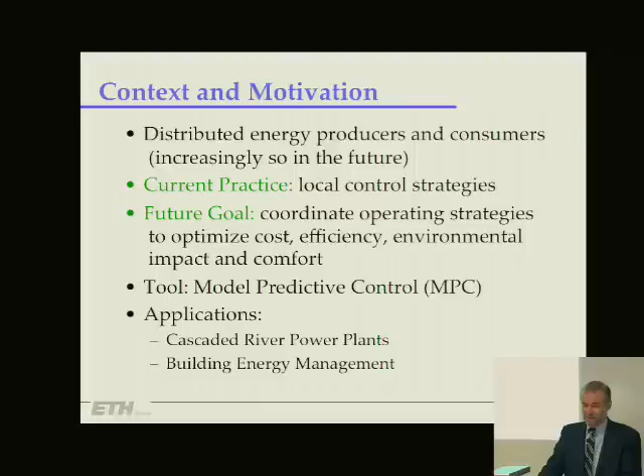The talk today will be very much application focused. Let me first give you some context and motivation for what's going to follow. Energy producers and energy consumers are distributed - consumers we know, producers increasingly so with the increase in alternative energy sources. The current practice, at least referring to the examples in the seminar, is to have largely local control strategies. The future goal would be to coordinate those strategies in order to optimize cost, efficiency, environmental impact, and comfort.

The tool that you will see being used is this technique, model predictive control, that I talked about when I gave this series of seminars here last year. I will briefly summarize that and then talk about two applications that we are involved in. Both are projects in progress, not completed. One has to do with hydroelectric power, and the other with building energy management. In both cases, we'll see how we can apply model predictive control.

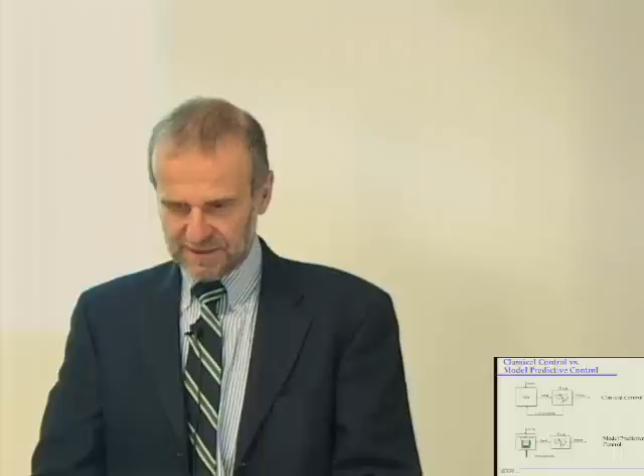So first, let me give you a short outline of model predictive control. You have on top this slide showing, I think it's an automatic transmission. Classical control would be what you learn typically in your undergraduate control course, some transfer function or something like this, K of S, that represents the controller. But what you would do now, and what I will talk about, is replacing this controller K of S with something much more elaborate, complicated, and sophisticated - I just call it optimizer here.

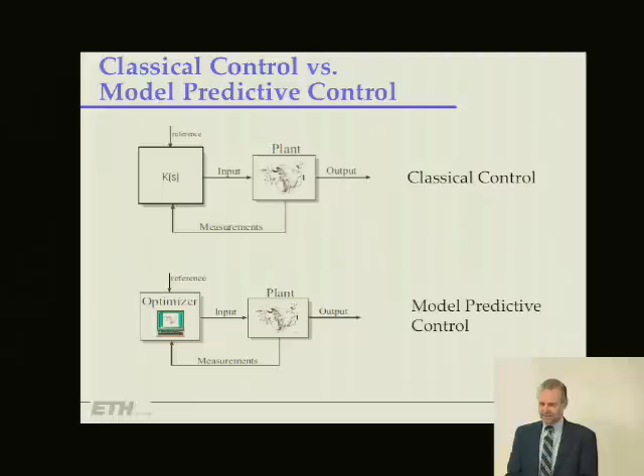The idea behind this optimizer is that you will solve a so-called receding horizon control problem. For example, you would like your system to follow some trajectory indicated by that line. Then you formulate a problem in order to calculate the manipulated variables over some future horizon such that your predicted system trajectory follows as closely as possible, defined by some metric, the required set point.

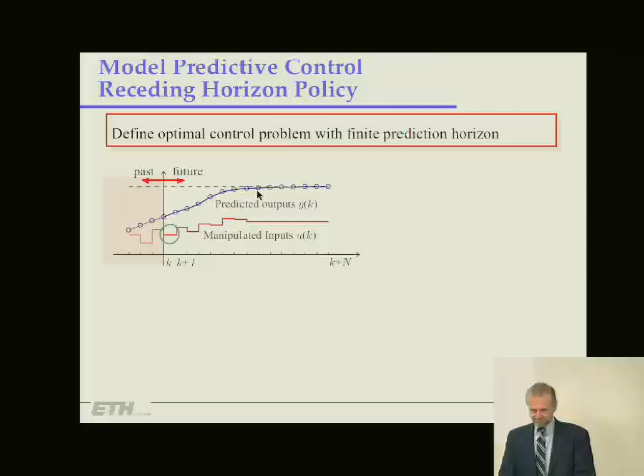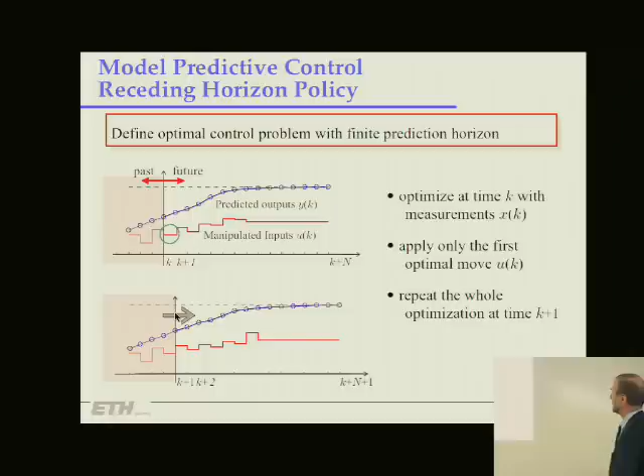And obviously, disturbances may happen, model predictions may be inaccurate, and so the idea is that you apply only the first one of those pre-calculated moves and then take another measurement of the situation of the system at the next time step.

Formulating it somewhat more rigorously, we can formulate a performance index, some P norm of a weighted state and weighted input over some horizon n. The objective that we minimize online is that we find the sequence of control actions U over this horizon, as indicated previously, such that we minimize this objective subject to model information, subject to constraints.

Looking at the block diagram again, similar to what I presented before, we have this optimization problem. We figure out the sequence of future control moves, we implement only the first one on the plant, retake information from the plant as a new measurement, and then redo the optimization problem.

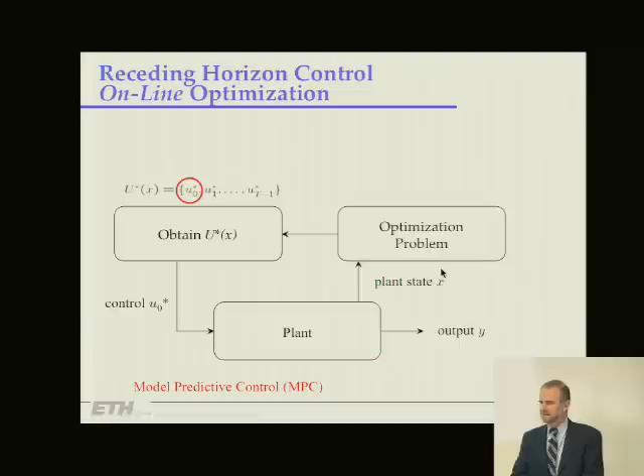Now, almost 10 years ago, it was realized that you actually can pre-compute rather efficiently, at least for a small system, the solution of this optimization problem. So instead of solving the optimization problem online for each measured plant state, you just pre-compute the solution for a set of plant states that you are likely going to visit. This is then called a parametric optimization problem.

Instead of solving it online, you're computing a lookup table effectively that has the solution of this optimization problem: you have the state, and the control action explicitly given. So online, all you need to do is use this lookup table. That was around 2000, discovered more or less simultaneously by different groups in Norway, Australia, and Switzerland. That you can do it in principle is clear, but that you can do it numerically for a reasonably sized practical system was not obvious at that time.

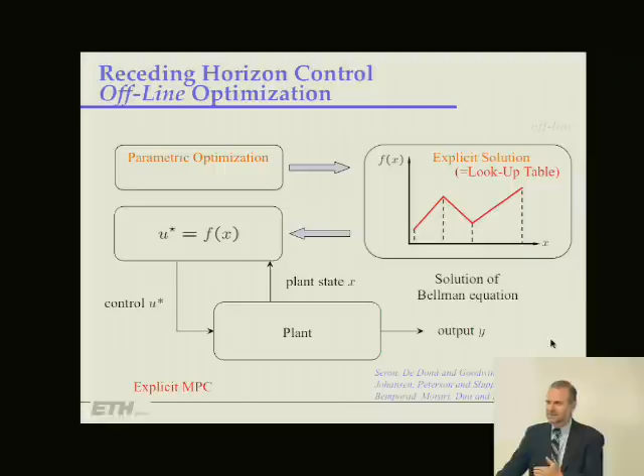What's interesting, looking back, I just came from a workshop in Pavia on nonlinear model predictive control last weekend, and 10 years ago there was the first such workshop. Then, the whole workshop was focused on process control and chemical engineering problems. Now, 10 years later, process control had essentially disappeared, and the workshop was focusing almost exclusively on a wide range of other areas.

And why? One reason is undoubtedly this explicit computation, and improved computational resources in general, that now allow this somewhat more complicated approach to control computation to be taken to a whole new group of applications.

In terms of properties, clearly, if I calculate this control law explicitly as indicated, or implicitly by doing this online optimization, I get the same control action, so the properties carry over from the online optimization to the explicit control law. These have been studied extensively in the literature over the last two decades, and very strong results are available on how to choose the controller parameters, how to formulate the optimal control problem such that this receding horizon property guarantees stability, guarantees satisfaction of the constraints, etc.

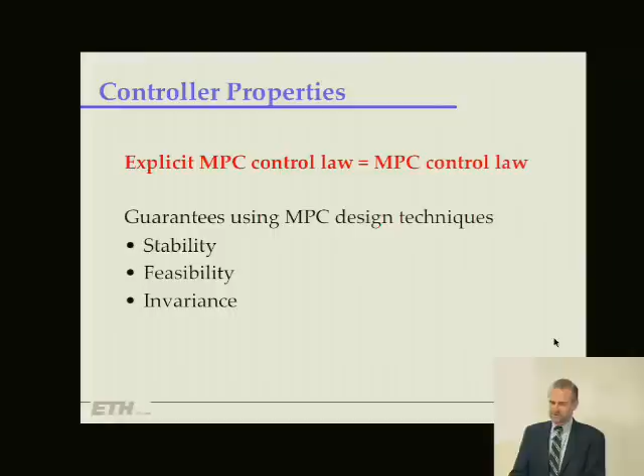And I would claim it's actually the only tool that is applicable that broadly that gives you those types of guarantees.

Depending on the model that you use and depending on the objective function, you get different types of optimization problems. Most commonly, and what was the original formulation, is that you just have a linear system plus constraints, and then this optimization problem, which you would have to solve online to obtain your control action, will be either a linear program or a quadratic program, depending on the objective function.

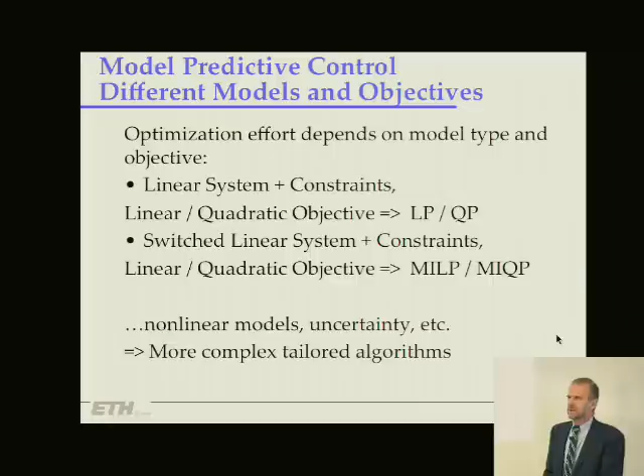In the next step of complexity, if that linear system is not constant but a switched linear system, then the resulting optimization problem would be a mixed integer linear program or a mixed integer quadratic program, again depending on the objective function. A lot of other extensions were studied with nonlinear models and how to account for uncertainty, and depending on that formulation, you get more complex optimization problems that generally need to be tailored to that particular structure of the problem, in order to allow an online solution, or even an offline solution, within the sampling time that is available.

So that's the background. What I want to do now is go into the first of those two application areas and show you how those problems are handled traditionally, and how they are now handled, or intended to be handled, within this new framework of model predictive control.

So this first project is a collaboration that's going on, financed by E.ON, the big energy company. There are also two smaller companies: Wittmeyer, that makes control systems, and Cytec, which is a consulting company, especially for the hydroelectric power sector.

So how important is hydro? If you look at global electricity generation, about two-thirds of electricity globally comes from fossil sources, and the rest, half of it comes from hydro and half from nuclear. Then there's a little bit of new renewables, meaning not water, but solar and wind, etc.

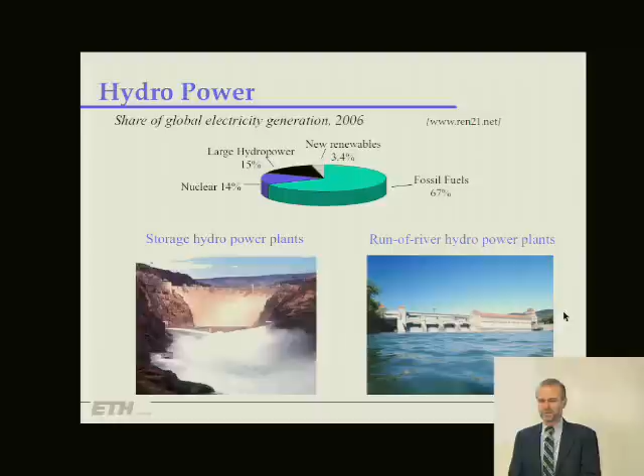In hydro, you distinguish two types. You have some storage hydro plants, like indicated here, or you have river hydro plants, and that will be the type of hydro plant we are focusing on in our work.

Now, looking at Switzerland, obviously a small country with small consumption, but Switzerland is very green in the sense that roughly half the electricity comes from hydro and half from nuclear. There's no fossil power. I say roughly because there's a rumor that some odd accounting is going on, in the sense that one buys electricity from nuclear plants and stores it in hydro, pumps water up and stores it there, then sells it as green power the next day. But roughly it's 50-50.

In terms of the distribution between power plants, you have about half run-of-river and half storage power plants, and then a small percentage of hydro power plants used for energy storage.

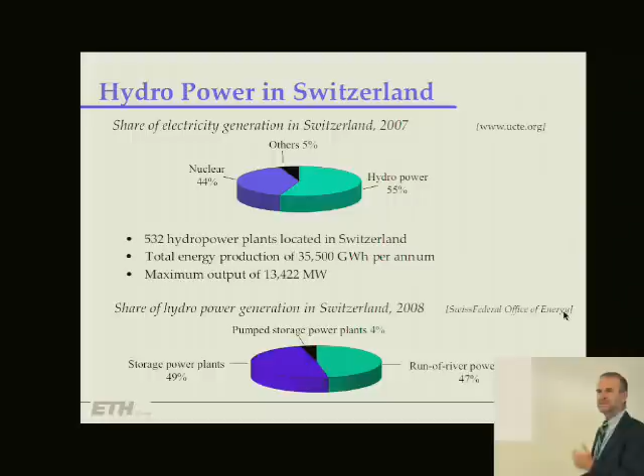We had a big discussion just two days ago in terms of energy storage, and it turns out that, assuming you have the space and water available, that is one of the most effective ways of electricity storage. It's about 75% effective, meaning you get the electricity, run the pump, pump it up, let it down, regenerate the electricity, and you have about 25% loss. That's hard to beat with other technologies, at least at present.

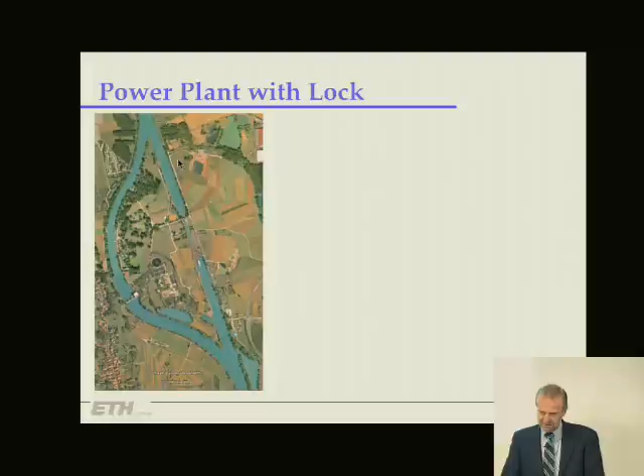So let me give you the problem definition. Here's a power plant aerial view -- sorry, river aerial view. The power plant is actually this little thing here. This is the route of the river used for shipping, and you have some locks at this location.

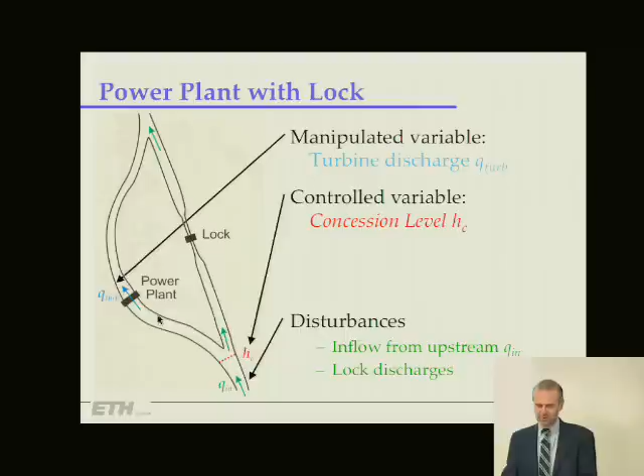As disturbances, you have inflow from upstream on one hand, and second, operation of the lock, which disturbs the flow of the river. You have to account for this when you operate those turbines to keep the level at the required point.

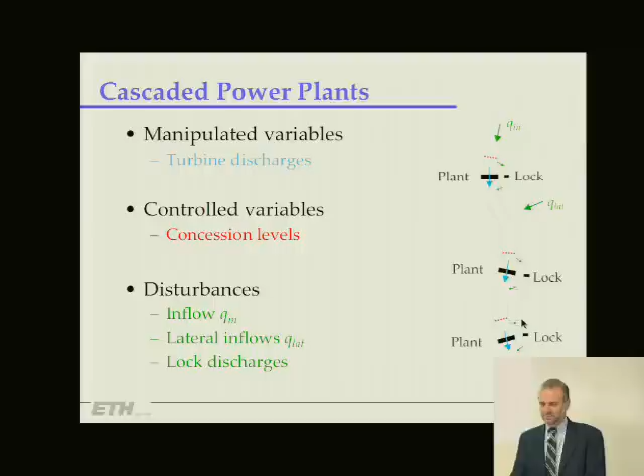Now the challenge comes when you have a cascade, another single power plant, indicated here. The variables stay the same. The cascade also offers the challenge of having inflows from the side and disturbances from the locks, and you have to, in principle, coordinate those tasks between the different power plants.

Now what's the objective, at the minimum? It is that you want to keep those concession levels within a certain range, that you don't want to change the turbine flow very frequently, and you want to respect the concession level, and you also have some absolute constraints on the turbine discharges.

Now there are other objectives we have not considered at this point, but which can be important in certain situations, and that would be maximizing or optimizing the economics as the driving objective when operating those power plants. The idea is that you generally charge more for electricity at peak periods than, for example, at night. So you could think about storing the river flow in those pools at night and then generating electricity during the peak price period during the day, while obeying the limits you're allowed in your operation.

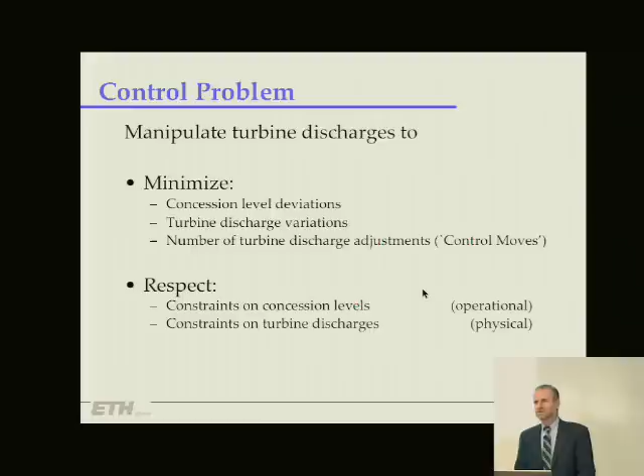So there's this link to economics, which in this particular site we are studying is not possible or not relevant, because you don't have enough capacity to do that storage. But I heard there are facilities in France where that would be attractive.

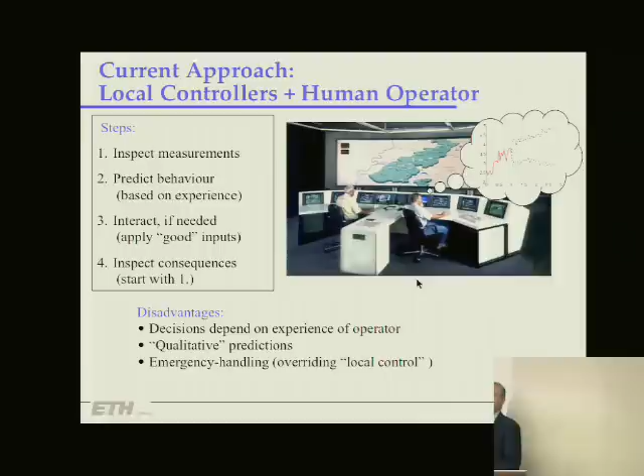So, control strategy: what's done traditionally is they have some simple local control strategies, and a big operator console that looks over the whole river, where operators inspect the behavior of those local control strategies. They check if everything is okay, and if they see likely wrong behavior, they step in and do some overriding actions that correct the local control action. So it's rather primitive, what is done at present.

And clearly what we would like to do is replace, or at least substitute or assist, the operators with a more advanced strategy, where we use a model to predict the behavior of the river and then apply optimal inputs, in the sense I discussed, in order to meet those concession levels, optimize economics, etc.

So let's talk a little bit about the modeling and the control. For the model, we use the classic partial differential equation from Saint-Venant, dating back to the 1870s.

That is the typical hydrology equation that is used. We have conservation of mass on one hand, conservation of momentum, so we get a first order partial differential equation, which gives us the flow as an input parameter, and which gives us the height of the river as a function of the location and the time.

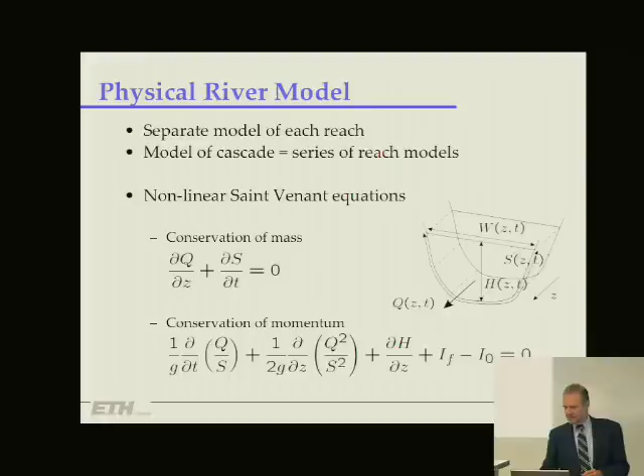And that model is discretized in time and space in a standard manner, and gives us then in this form actually quite a high accuracy description of the behavior of the river, relatively high order.

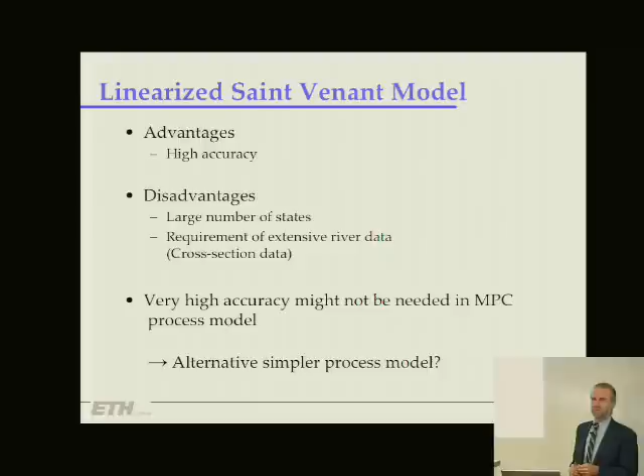And the question that we will have to tackle, as I will mention later on, is that to look at somewhat simplified models, because we will get, as you will understand in a moment, very large optimization problems that can at present not be solved in the sampling time that is available.

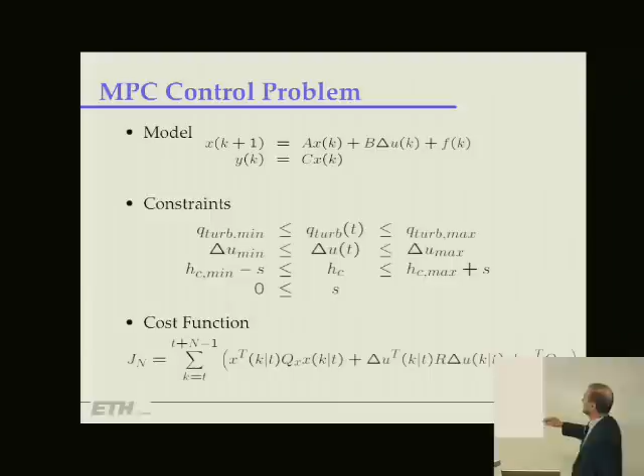Here an indication of the model predictive control problem formulation. So it's rather standard. You have your constraints on the turbine action, on the change in the turbine, and you have constraints on the levels, and you can handle those with slack variables, where you put different weights on the slack variables depending on the range in which you allow this level to vary.

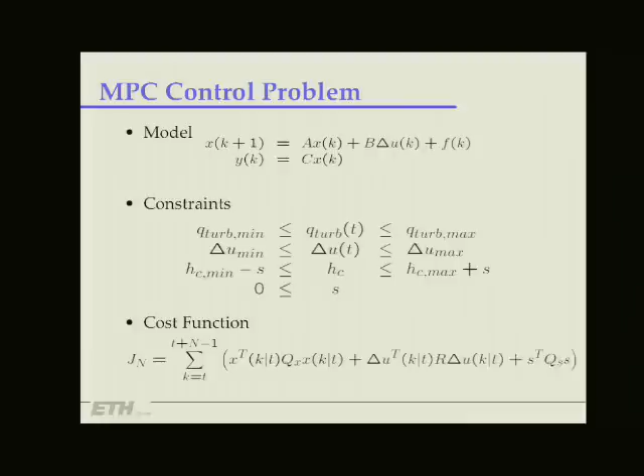So up to now, with a linear model, linear constraints, quadratic objective function, you would have a QP, which would be very easy to handle.

Unfortunately, there's some other constraints that the operating people rather insist on, and that is they want to enforce a dead band on the turbine discharge variations.

That means they don't want to vary the turbine every 5 minutes by a tiny little increment, but they say we vary the turbine only once it prescribes a variation that is above, outside, or bigger than a certain deadband range. And so in order to model this type of deadband, you need some integer variables that model this switch that you want to enforce.

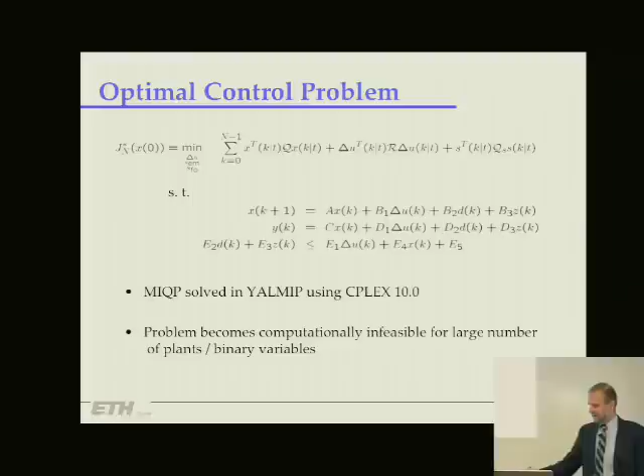And the problem here is, especially, or only, because of this integer variable, that the problem becomes computationally infeasible within the time period of the sampling time, which is 6 minutes, for a larger number of plants, and that will indicate what larger is in our context.

So in terms of case studies, at this point, simulation case studies, but the intent is that it will be implemented on the whole river. We have a very detailed model of the river with a simulator from the company SCIETEC that I mentioned.

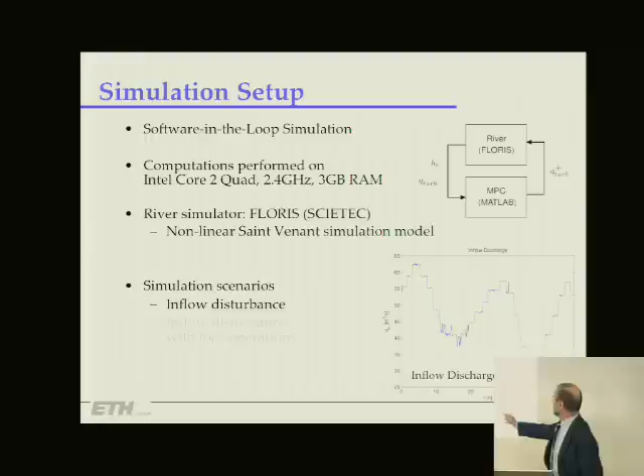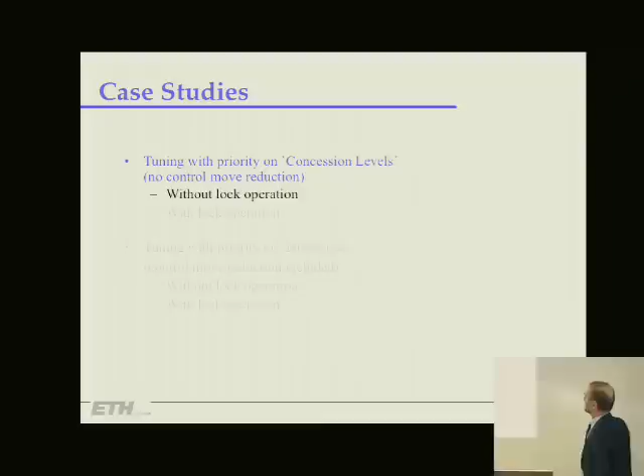And we are studying the behavior for a range of inflow variations of the type indicated here. I will not show you the many case studies that we have done, but just one or two that will indicate the behavior that can be achieved relative to the current strategies.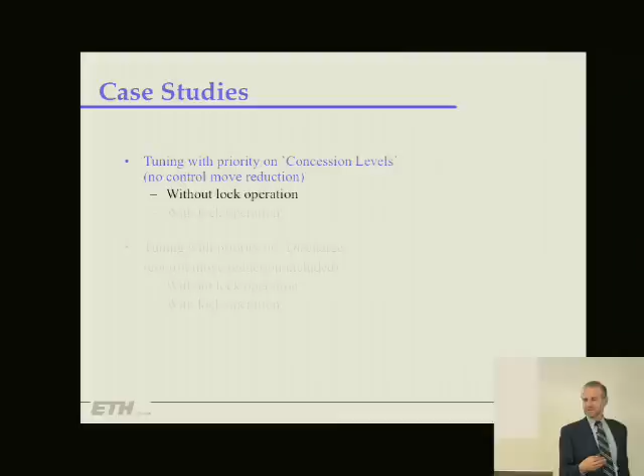So here's a behavior that emphasizes in particular holding the concession levels constant. You can obviously go the other extreme, wanting to vary your turbine as little as possible. So you can go through the whole continuum of strategies between those two extremes.

So here are the details. This is the inflow scenario, and in this particular simulation, 4 power plants are considered, with a 6-minute sampling time. You look into the future, 25 steps, so about 2.5 hours. You have various ranges in which you want to keep that concession level.

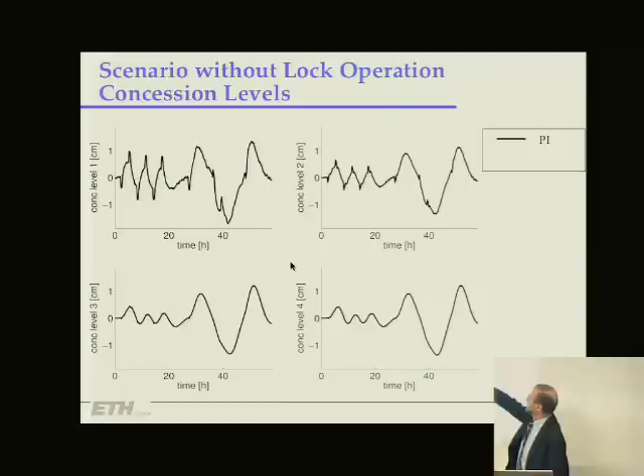So this would be a traditional strategy. What's given here is the concession level as a function of time in response to the disturbance input with a traditional PI controller, and then the improvement that you get with this model predictive controller indicated here.

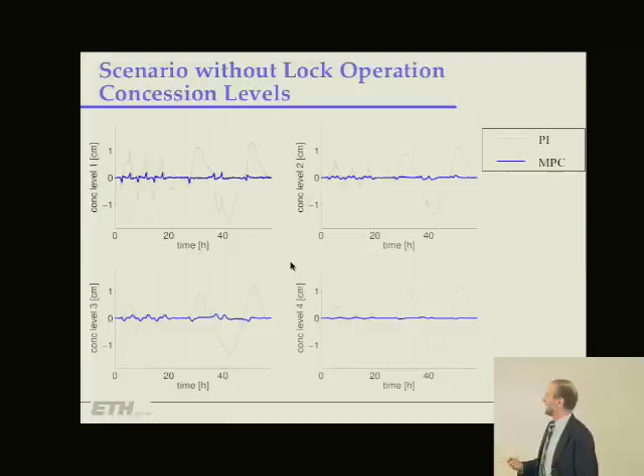Now, when one sees something like that, the first response is, okay, that would probably need very aggressive action of the manipulated variable in order to achieve that behavior relative to the PI behavior.

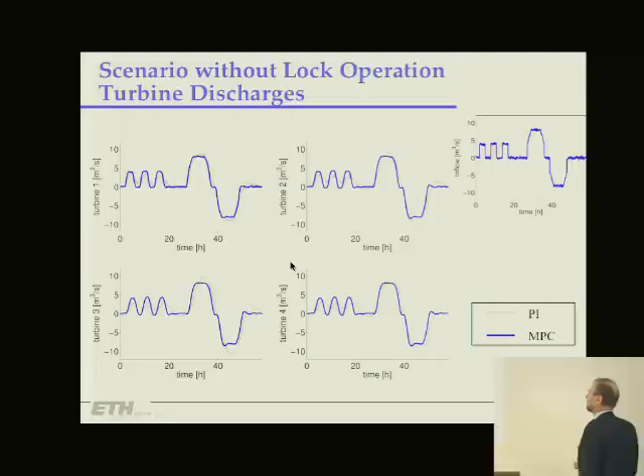But it turns out here the manipulated variable action, meaning the turbine discharges, again for the 4-power plant, with the traditional PI controller compared to the model predictive controller, the differences between the two control actions are very little. So it means with a better and more intelligent control action, you get vastly improved control without more aggressive control action as you would usually expect.

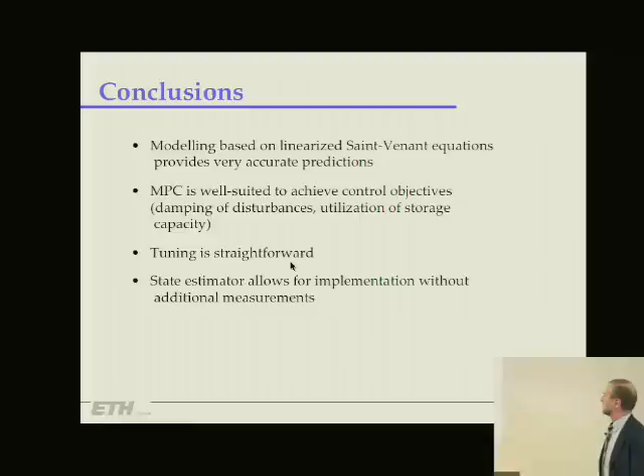So in terms of conclusions and outlook, models, as we said, are standard based on those linearized Saint-Venant equations. MPC is well suited for that example. Tuning is straightforward. State estimation is required, but also rather straightforward.

Now, what's the outlook? The outlook is to go from the currently 4 to 35 power plants. That is a river in Germany. Actually, there's no river in Switzerland where we have 35 power plants.

And not only that, Switzerland is so fragmented in terms of the power industry that you don't even have a situation where there are more than 4 power plants in a row owned by the same company. And if it's owned by different companies, then they don't talk to each other, so again, the strategy that requires coordination is not feasible.

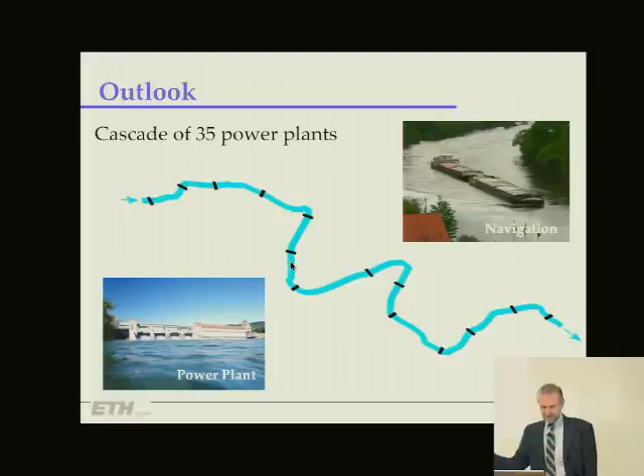But then in Germany, they have very big setups, going over a length of about 350 kilometers. And there, the strategy that we are investigating now is some type of decentralized MPC strategy, where we would have some local controllers with some coordination between the subsystems.

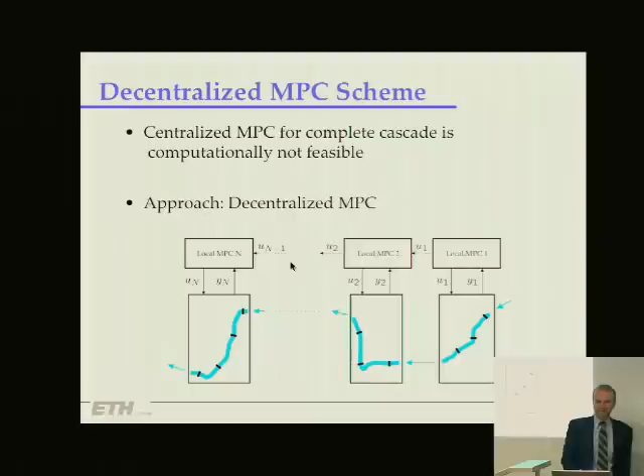The coordination, depending on the need, could be, for example in this case, probably only downstream, where you would forward the predicted turbine discharges from one power plant to the other to achieve that type of coordination. So this is the outlook.

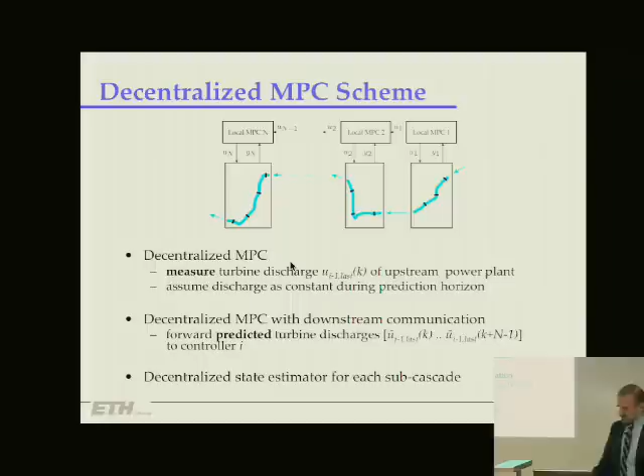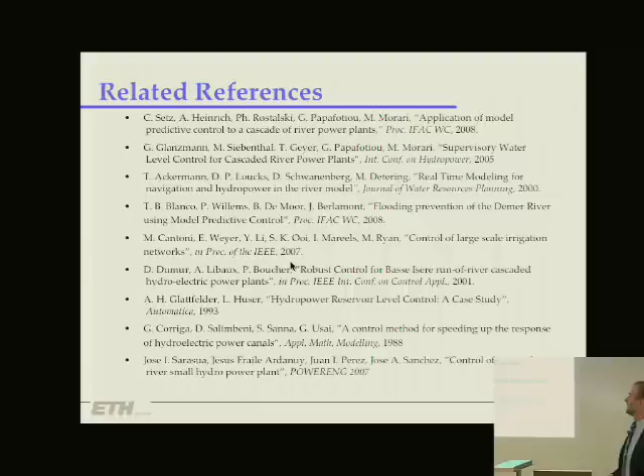I should mention, and I will not dwell on this, there are a number of references to what other people have done. The problem has been studied, for example, also in the context of irrigation channels, where the objectives are somewhat different, but the problem is similar. So that, as I said, is ongoing, and the objective is that next year this should be implemented by E.ON in Germany on the 35 power plant system.

So the second example that I want to look at is energy management systems, and in particular using weather forecasts in order to enhance comfort and to save energy. This is a large collaborative project, and I will describe the partners in a moment. We'll start with some data for motivation that I actually took out of a proposal that Berkeley was part of. So those are data for the US.

Why are buildings important? Buildings are a major consumer of energy. If you divide the consumers into industry, buildings, and transportation, each one of those sectors takes about 1/3 of the total energy consumed in the US. Specifically, buildings take about 39% of the energy, 71% of the electricity consumed in the US, and 54% of the natural gas.

Buildings are a major producer of carbon emissions. That means buildings are an extremely important consumer of energy and producer of carbon dioxide, and therefore should probably receive the primary attention in terms of improving energy efficiency and carbon emissions, rather than cars, for example.

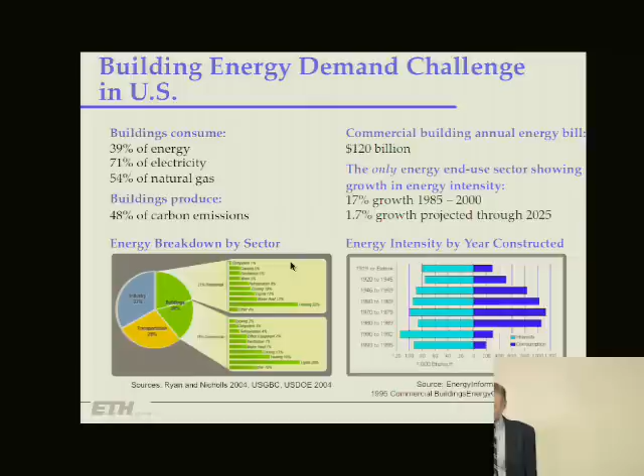Now, in this proposal that was recently funded, HiPerBRIC, where Berkeley, Lawrence Berkeley Lab, as well as UCSB and United Technologies are involved—the vision here is to come up with new strategies to enable a total transformation of the US commercial building sector over the next two decades.

And the goals are very ambitious, as you can see here: 400 million tons of CO2 reduction annually, reduction in energy consumption of 90% in new buildings, etc.

And obviously, if you see that, then you ask yourself, is this something you write for a proposal, or is this something you believe in? Is it something likely going to happen? Is it like weaning the US from fossil energy within 10 years? Is that equal to that? And actually, this is not unreasonable.

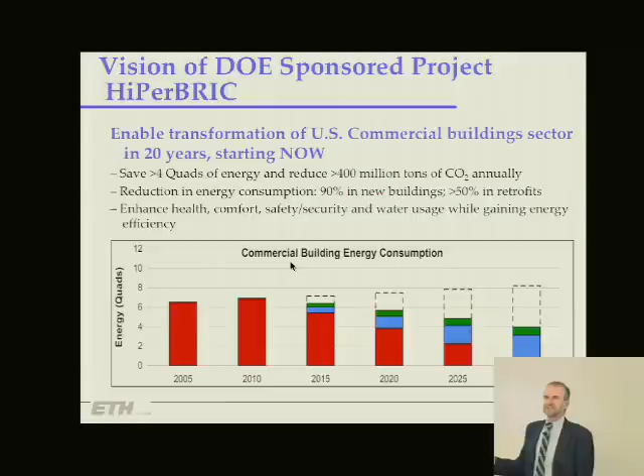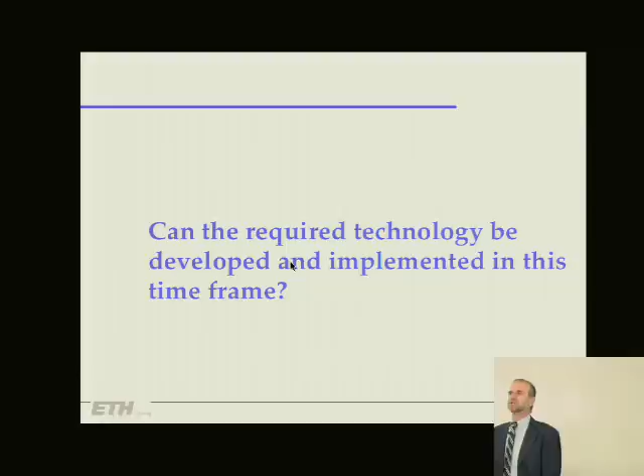I will now give you an example from Switzerland that shows there is a technology available that can be implemented in this time frame if one puts the mind to it. Now, this example is not easily duplicated, but it shows the technology is there to do that.

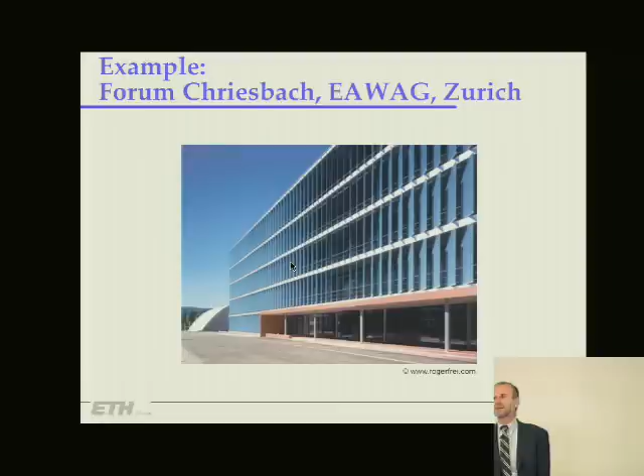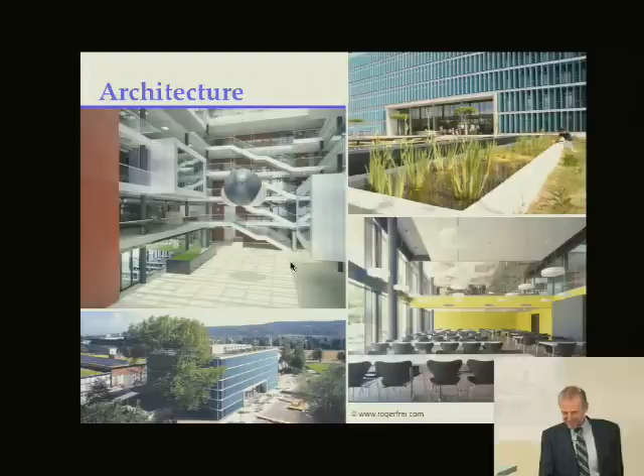It's a building that is actually part of the ETH buildings, close to the ETH campus, for aquatic research. Just to give you a sense of the building, it's 10,000 square meters, roughly 100,000 square feet. Cost 33 million Swiss francs, unfortunately equal to dollars now essentially. Area for 150 people: offices, lecture halls, seminar rooms, book communication zones, and so on. Architecture, I think, is beautiful. Here you have the water molecule as a main decoration in the building.

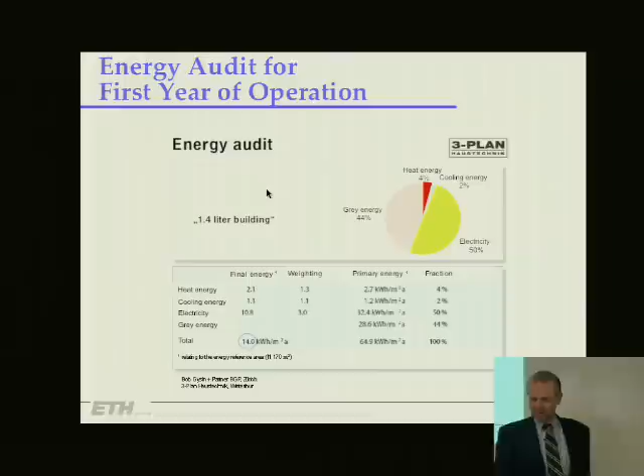Now the data from the first energy audit. So those are not design numbers, those are actually measured numbers of how much energy was consumed in that building. Focusing on this, this is a number of kilowatt hours per square meter annually. 14 - if you're not in this area that won't mean much, so I'll put that on a relative basis. This would be primary energy demand, kilowatt hours per square meter annually, for a usual new building in Switzerland, for a so-called minergie building, that's a new standard, minergie plus, and then this new building here that I was just describing.

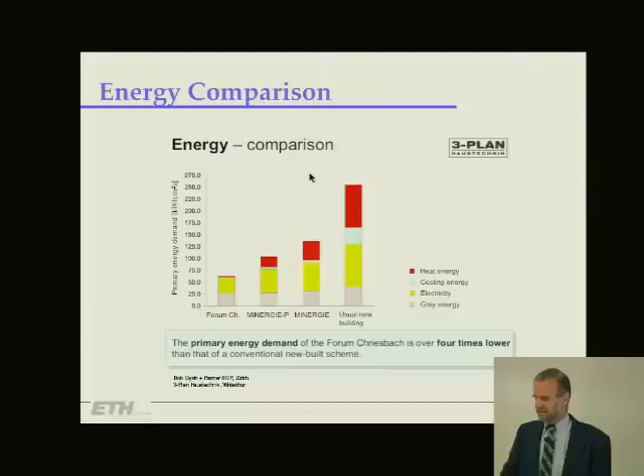This is actually the energy amortized over the life of the building, that's for the construction of the building. Yellow is electricity, and the heating and cooling is just this part here. And if you compare it with standard, that's a reduction of more than a factor of 4 compared to standard building technology in Switzerland.

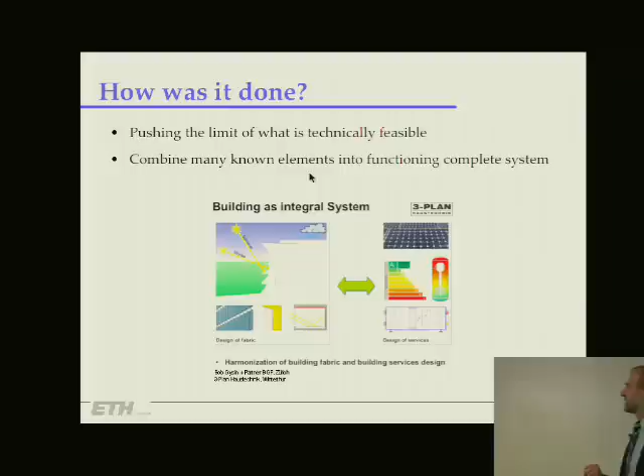So how was it done? What did they do to achieve that? Actually, no new technology was required. They just pushed the limit of what is technologically feasible at that time, and in particular combined the different elements in a systems approach in order to achieve that overall result, in particular coordinating the building structure and the building services design.

And this is just as background for what we want to do, utilizing those weather forecasts. First, the project partners that are involved with us: it's led by an institute called Terrestrial Systems Ecology, our lab, the material testing lab of the ETH, then the Federal Office of Meteorology and Climatology, and Siemens Building Technology. Siemens, you probably know, is mostly headquartered in Germany, but actually Siemens Building Technology is headquartered in Switzerland because of some acquisition that went on. It's a 4-year project funded by various agencies, and we are here at the beginning.

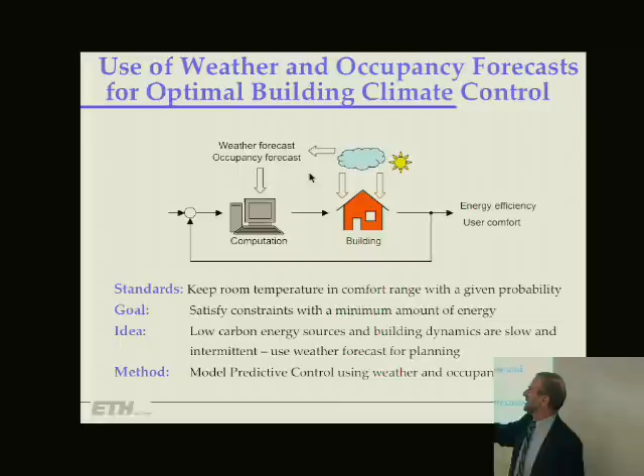So the idea is obvious in the sense that building dynamics tend to be slow - this is an old building, a lot of thermal mass. You have new energy sources that tend to be intermittent, let's say solar or wind or something like that. And so clearly it would most likely help to know what's going to happen with those sources when you control the climate in that building. So the idea is you include those weather forecasts in the control strategy that you are proposing for the building. And I will show you some preliminary first results on what you could possibly gain from doing so in a particular situation.

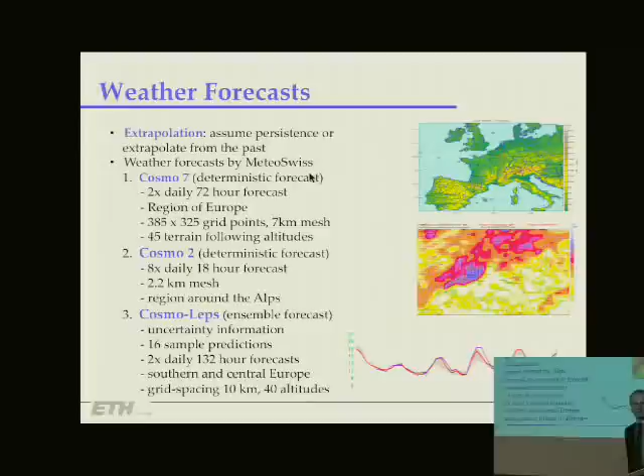So weather forecasts - this is a shopping list of what we have available in Switzerland at least, from the simple, meaning simple extrapolation that tomorrow will be like today, to 3 different elaborate models that can give you deterministic or even ensemble forecasts with some uncertainty information. And the models differ in how often per day they provide those data, over what time horizon, over what area, the grid point or mesh size that's available, etc. Now, obviously, at the end, we want to use the simplest that gets us the furthest, and we will see what that is.

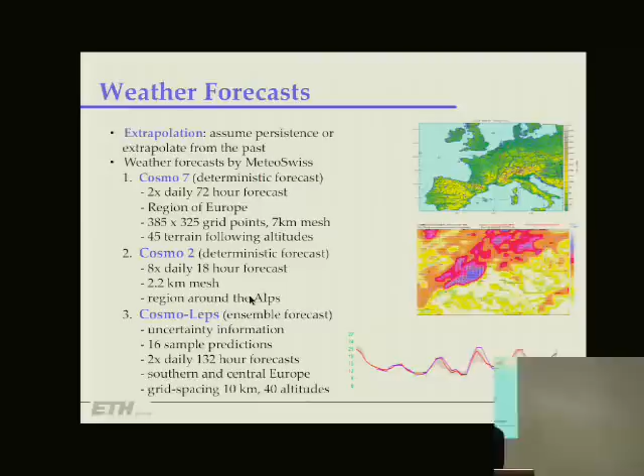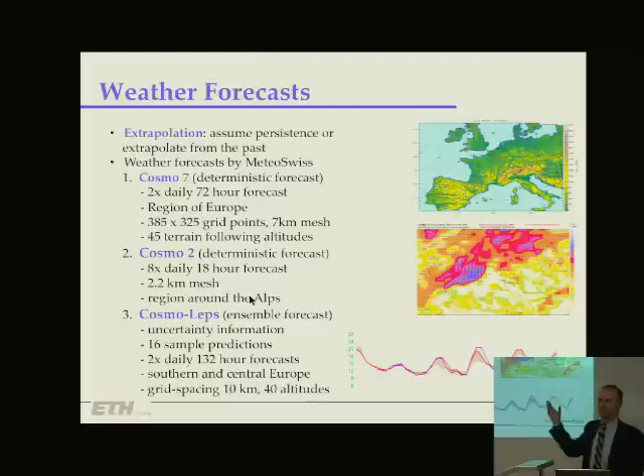I was actually also very surprised - I don't know if anybody's here from this area, but I expected that all those weather forecasts you see on television are basically automatic, that you generate this and give it to the people, but it's not the case. There are people interpreting, personal interpretation, and this is what you see. Actually, there's almost nothing that is immediately automatic, so there are some people filtering in between.

So at this point, we're looking at a small part of this whole building automation. We're looking at integrated room automation, and that means integrated control of the heating and cooling system, blinds, and lighting.

Clearly, as I said, the idea is obvious. Question is, does it gain you anything?

Before we get involved in developing elaborate control strategies, you want to find out what I call here the size of the prize. How much is potentially in it in such a control system? How much can you gain using weather forecasts?

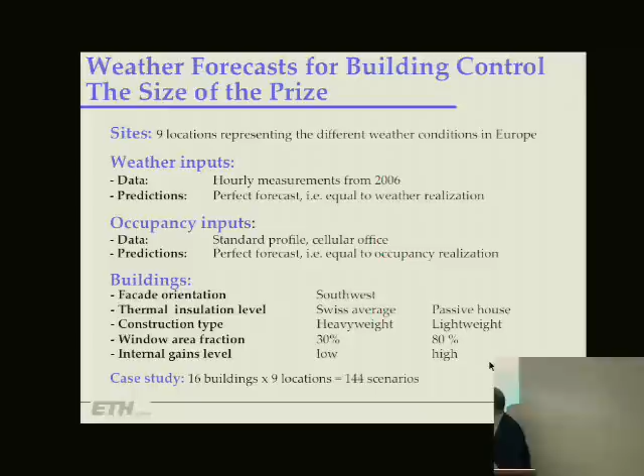So we did a massive set of case studies across different locations in Europe, weather input, occupancy input, building orientation, different thermal insulation, construction type, window areas, etc. This is a sample from about 150 case studies, and I'll show you some numbers from those.

This should not be mistaken as what you can actually achieve. This is the maximum you can achieve—the ideal situation where you assume the weather forecasts are perfect, you know exactly what's going to happen, and you have a model of the building, etc.

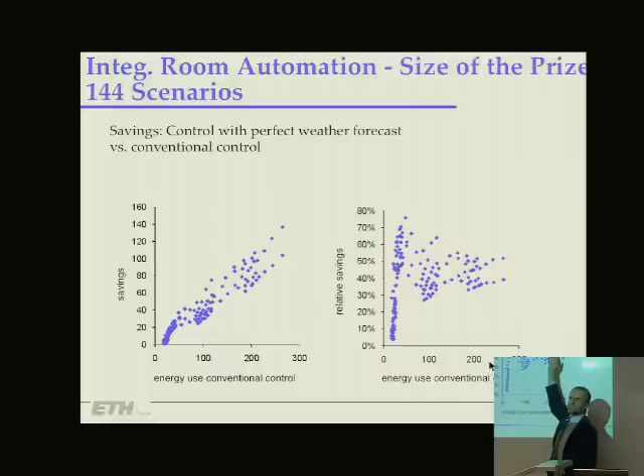You see that for some scenarios you can achieve quite significant savings, but there's also a significant spread—in some cases you can save almost nothing, in others a lot. So it's very situation dependent.

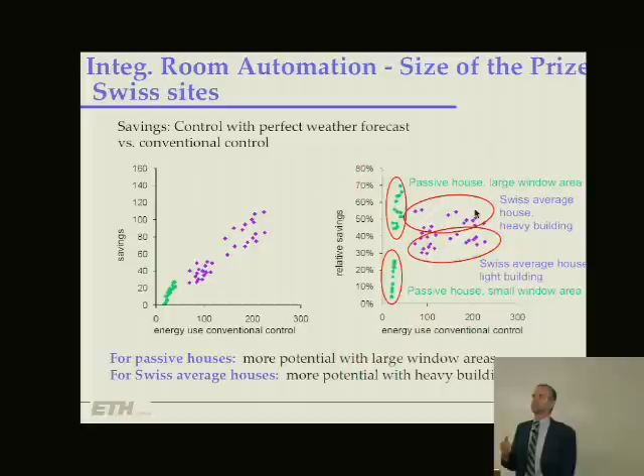If you analyze further—and this is again a glimpse at a large amount of data—for example distinguishing passive housing from the Swiss average house: large window area is good for passive houses, while heavy buildings with large thermal mass are good in terms of having a lot of potential for improving energy efficiency by utilizing weather forecasts.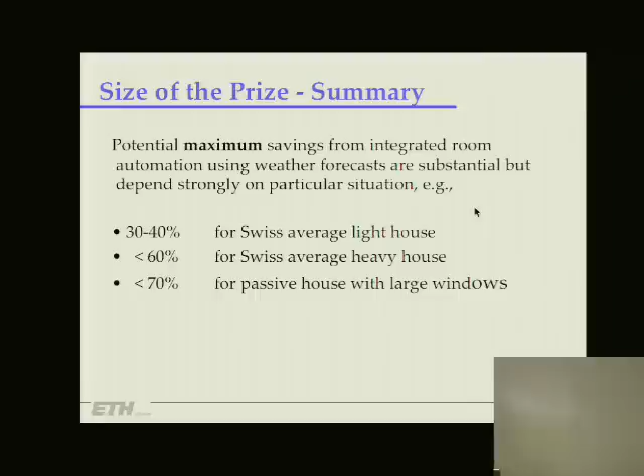So this is summarized here. I emphasize the potential maximum savings from such an integrated room automation system, but it depends strongly on the particular situation—it can be 30 to 40%, 60, even 70% in some cases.

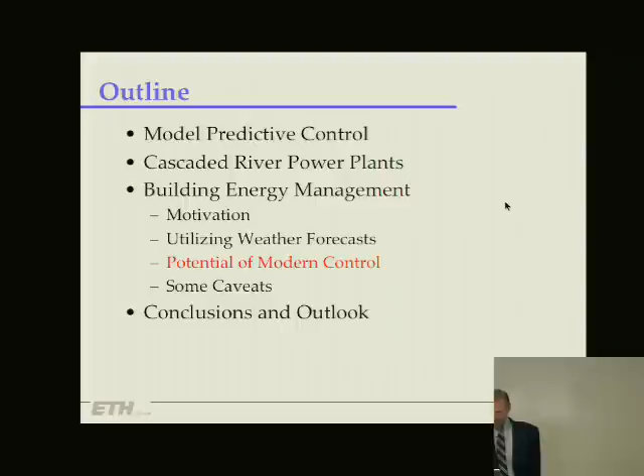How can we get there? I gave you a maximum achievable energy efficiency target, but what do we have to do to get to that target? That's about looking at different control strategies.

I want to give you a sense of what these control strategies do in the context of building control using weather forecasts, using diagrams which are largely cartoons. The idea is you don't need a perfect temperature in this room—say 68 or 70 degrees—you need a temperature range, and you want to obey that range most of the time, 90% of the time, etc.

So we have this comfort range, and here the violation of the comfort range. If you don't care at all about the violation, the energy you need is zero—just open the windows, the comfort range is violated, and you don't need heating or cooling.

As you want more comfort, as the violation gets smaller, you pay more for it. If you want the room perfect every day, you pay a lot more than if you accept that 90% of the time it's okay and otherwise a bit too hot or cold. That's what's indicated by this trade-off curve between the energy you need and the comfort violation.

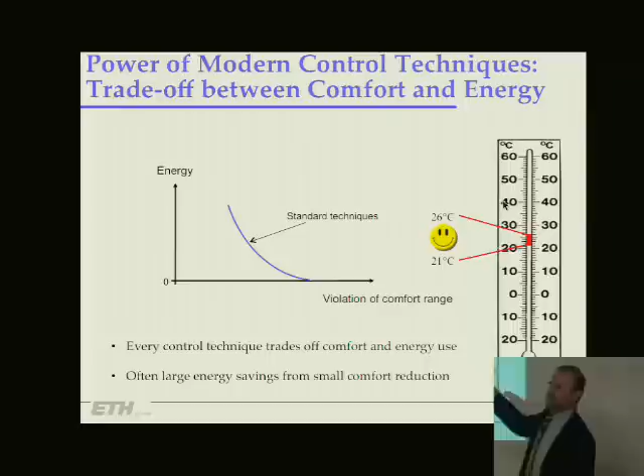So, for example, a standard controller will give you a particular trade-off curve. Now what this target would do is something like this—it would give you a performance bound.

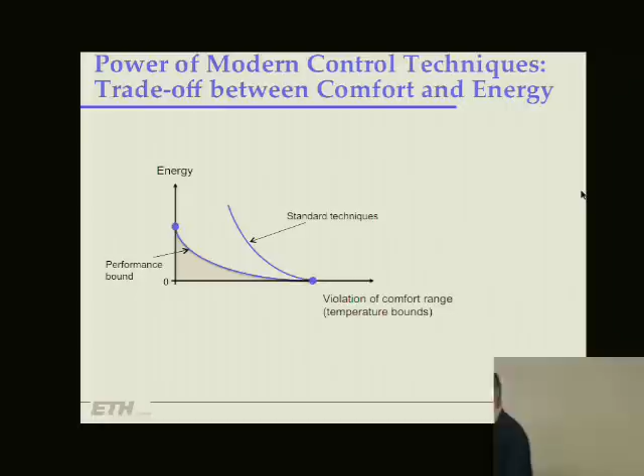What does this performance bound mean? Down here you have infeasible specifications—basically wanting very high comfort, little violation, for zero energy. Those are infeasible. Up here you have the feasible specifications, and then you have the degrees of freedom.

For example, you can reduce energy up to this point for a certain comfort range. This would be the Pareto optimal curve, where along this curve you can only reduce energy by giving up comfort.

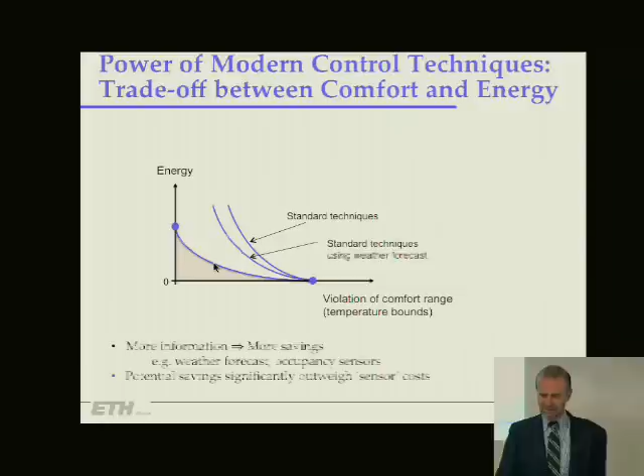But we're actually interested in reducing energy from somewhere up here without reducing comfort. So we want to shift the standard techniques over to the left, giving a better trade-off between energy efficiency and comfort compared to standard techniques.

So that would be, for example, using only weather forecasts but not uncertainty information. The next step would be using uncertainty information as well as the forecast. What's the idea? If the forecast is wrong, it will have a wrong climate control and poor comfort.

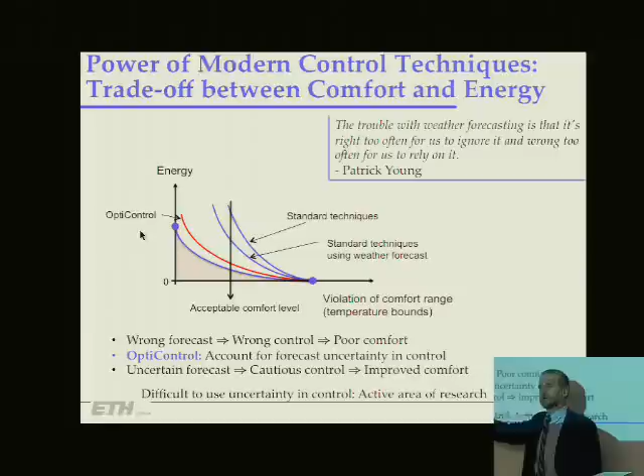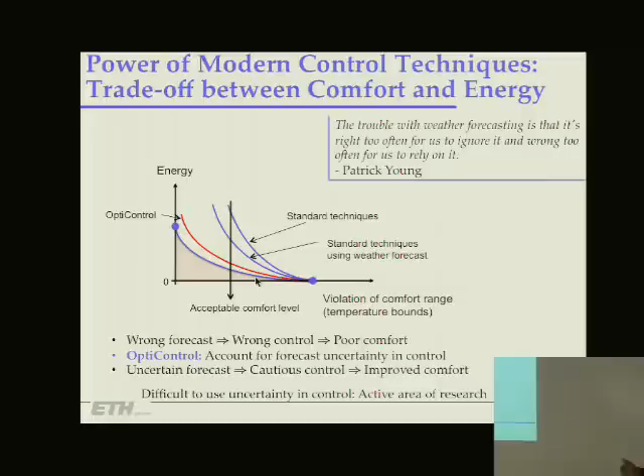Now, what we want to do is account for the forecast uncertainty. That means when the forecast is very uncertain, we'll do a cautious control and improve comfort. That gives you this better, improved trade-off curve, as indicated by the red line.

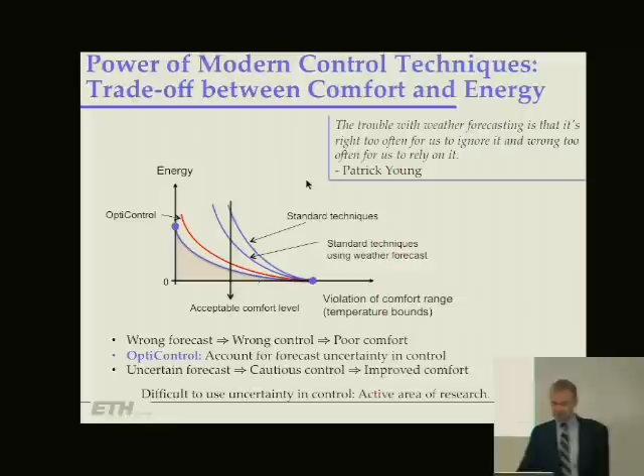That requires basically a stochastic optimal control strategy that gives you that good comfort as indicated by the red line here. We have done some numerical work on developing methods applicable also at this large scale problem, and I would be happy to discuss that in more detail in the questions. I also have slides to explain what we have adopted for this purpose.

Now, some caveats, some warnings. What is standing between the ideal building that I showed you from Switzerland, between this optimal control strategy that I present here, and the real world? The issues that stand here are non-technological, but they may actually be dominating what we can do in terms of realizing those energy savings.

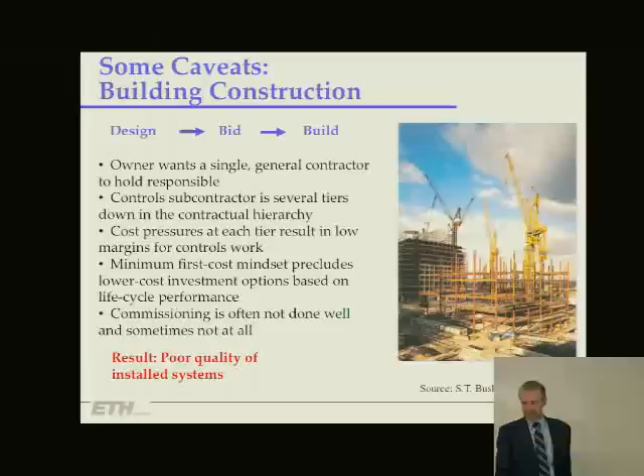I took this from a talk that was presented at the American Control Conference last year from Mr. Bushby from NIST. There are two problems: one is already on the construction side, and one is on the operation side.

When a building is constructed, and here the indication is for a large commercial building, one general contractor subcontracts it out to a number of other companies, and those cost pressures that come from the owner are passed down several levels to the subcontractor. So at the end, the only thing that counts is the cost at the moment for the building, not anything about life cycle performance for the system that is eventually installed.

A big other issue is the commissioning after the control system is installed. That is often either done not well or sometimes not at all. As I emphasized, that presentation was about the US. The person we work with at Siemens, Jürg Tödtli, said in Europe it's exactly the same. So this is not any different from country to country.

Now, once the system is installed, the second issue is operation. Building maintenance staff are poorly trained. Maintenance is usually done only when something is broken, and when it's broken, one introduces a fix, and that fix is then left in place even when it's not needed anymore. So the original system can't do its job that it was designed for. If you need to save money on the building, then the first thing that's cut is facility budgets, and that then has an impact on the control and the energy performance.

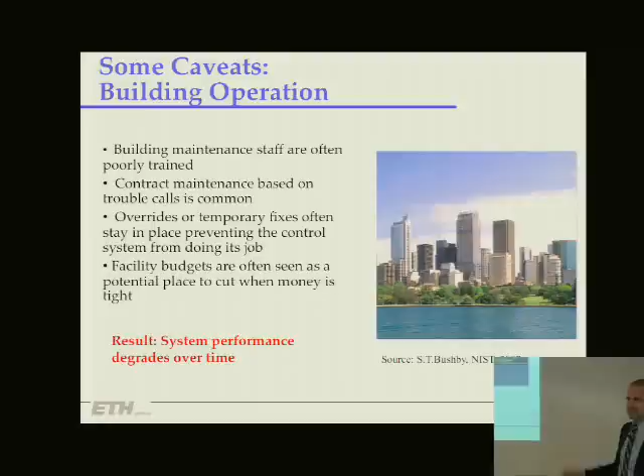Just an anecdote: when I talked about this, at a workshop organized by ABB, I was in a room where there were rows of vents to the building. One row was for air inlet, and next to it was the row for the air outlet. So whatever came in would just be sucked out right next to it. That's just an illustration of a problem mentioned by Mr. Bushby in those slides.

So in conclusion, in terms of building climate control and building energy management, it's quite apparent that advances in information technology are enabling, in principle, major changes in building energy management. The energy savings from control utilizing weather forecasts can be large potentially, but it's very highly dependent on building location, orientation, etc. Therefore, our ultimate goal in this project is to develop an assessment tool where you enter all this information and it tells you what are the likely savings from what level of control sophistication.

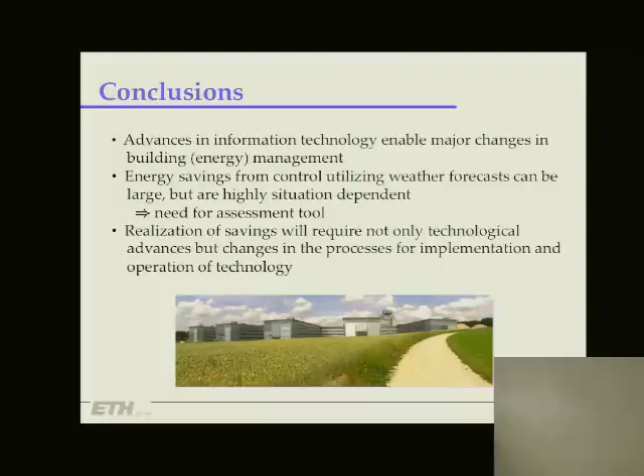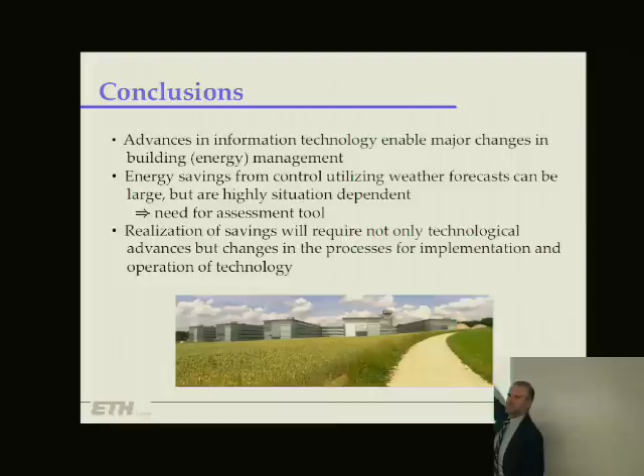The final point, maybe the most important point, though nothing that we do has any impact on it—that's a different group of people responsible for that—is that the realization of those savings will require not only the technological advances we are trying to achieve here, but changes in the processes now used for the implementation of the technology, and for the operation and maintenance of this technology.

And with that, I want to close. Here's a picture at Siemens Building Technology of the team working on that. So I thank you for your attention. I would be happy to answer any questions. Thank you.